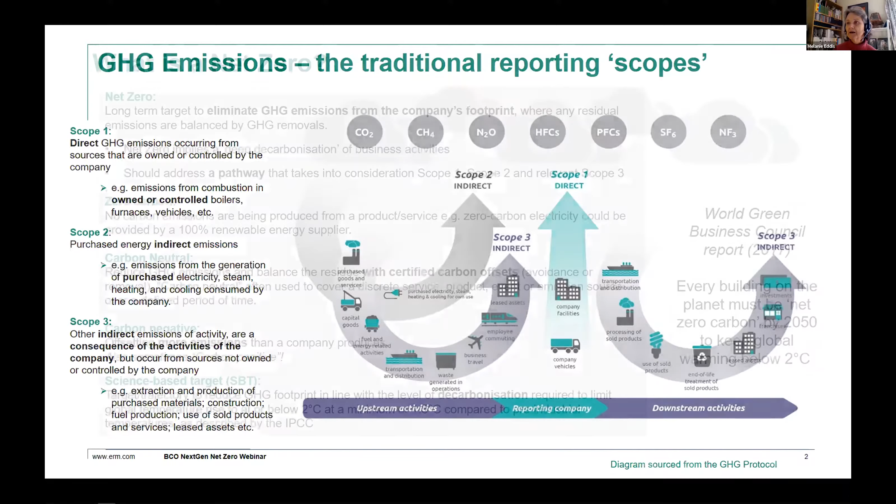So when you see carbon neutrality or net zero, it's important to understand what it is that has been neutralized, whether it's just the direct emissions of operations or whether actually it extends into the full value chain. There's lots of language around this, and this webinar is about net zero, and so with that in mind, net zero is about the trajectory to eliminate greenhouse gas emissions from the footprint. It's about the whole decarbonisation of activities, including scope 1, scope 2, and the relevant value chain emissions.

There are other words that you'll see, like zero carbon, like you might buy zero carbon energy if it comes from a renewable source. You see carbon neutral very commonly, which might be a product, or you might be able to take a carbon neutral taxi journey or receive a carbon neutral washing machine because the company has offset all of the emissions associated with making that. You might see carbon negative or carbon positive, where there's a trend now for double offsetting, or putting a big margin of offset so that you are more than offsetting your activities.

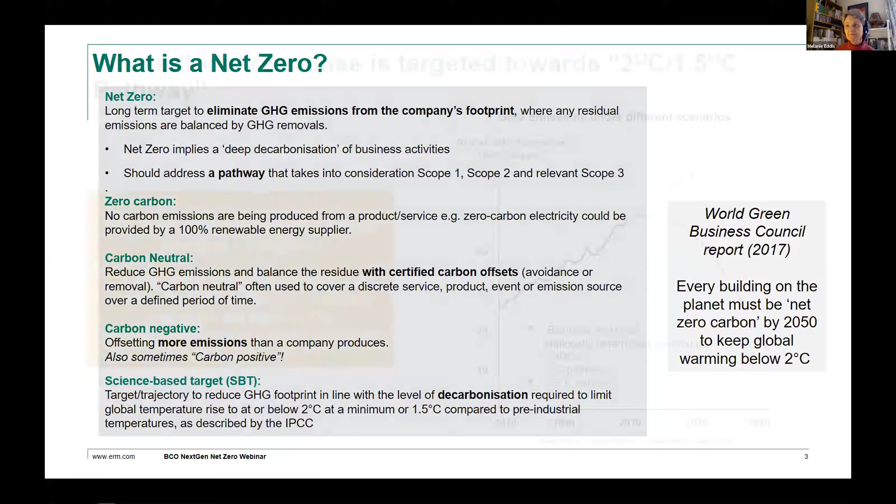And you're also seeing now companies moving towards the Science-Based Targets initiative, and we'll talk about that a little bit because it's really integral with the net zero concept of decarbonisation and moving towards what that means. And a little bit of the science: when we talk about net zero, that term stems from the IPCC, which is the Intergovernmental Panel on Climate Change, which is part of the UN process. And they issued a special report on the global journey towards holding the temperature rise at 1.5 degrees and set the pathways of how that might be achieved.

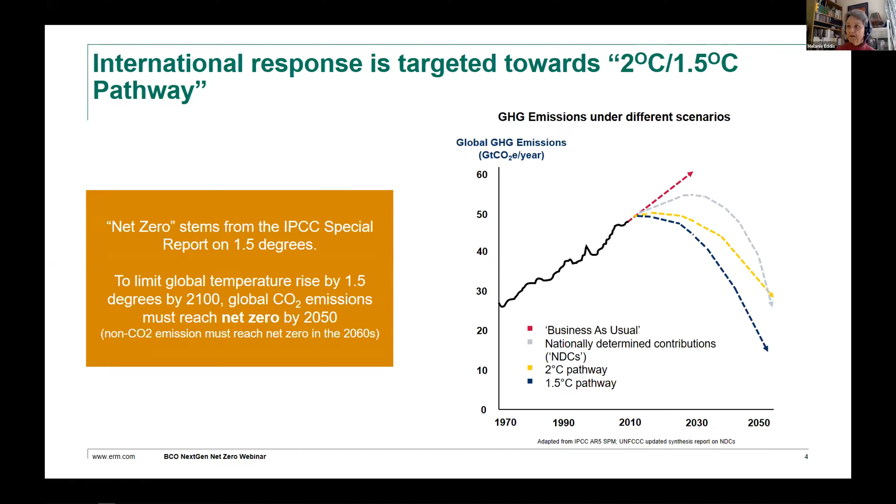And these trajectories are some of the modeled pathways that have come out of that IPCC survey, and they have firmly stated that we need to be on this bottom path, the 1.5 degree pathway, in order to safely manage the climate emergency. And what that means for you or for any entity or country that is making this net zero commitment. And one of the important things to bear in mind is that this is a moving feast. And these 4 graphs are what they call pathways. And it depends on how quickly we move.

So if we move quickly and decarbonize quickly, there's actually not much to do by the time we get to 2050 and beyond. We will have decarbonized and we won't have to invest in vast amounts of carbon removal, for example. If we don't move quickly and we end up in the P4 scenario, then we're going to need huge investment in carbon removals in order to compensate for the inevitable ongoing emissions that mankind is putting into the atmosphere. So they put forward these pathways in order to encourage governments and businesses to stick as close as they can to this early mover pathway, because that's the way to minimize that ongoing problem and the need for this massive investment in removals.

And this is directly linked into the Science-Based Targets Initiative, and there's increasing numbers of companies now which are signing up to the science-based targets, and that's about a company setting its own targets, and that's a commitment to be in line with that trajectory. And what that means is that if the world doesn't move fast enough, then we've all got to do more. So if we get to 2030 and nobody has done anything, then everybody's going to have a steeper curve that they'll have to move down. So what everybody does on a day-to-day basis is going to be challenged by how the global initiatives move towards decarbonisation.

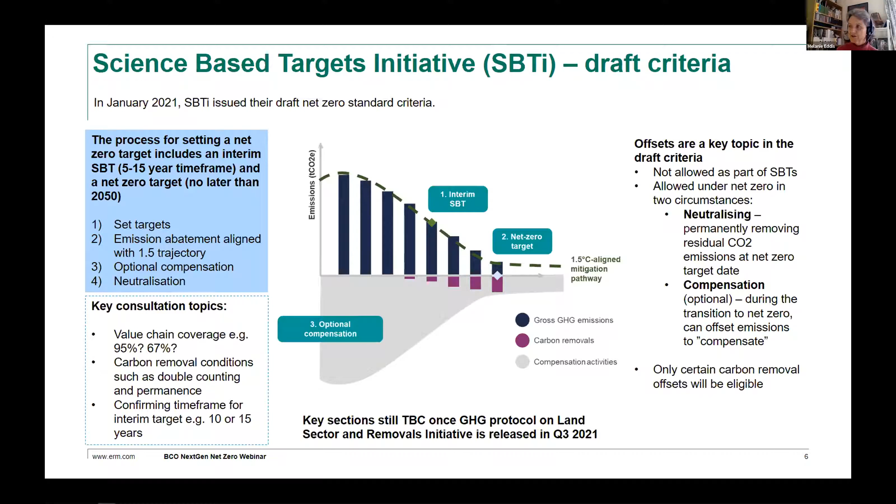Now, how you get there is that offsets are many and varied. There was a question about whether offsets can be local or whether they come from far afield. At the moment, any offset that you buy is going to come from far afield. The nature of the way that the international process has worked over the last 10, 15 years has been that emission reduction projects tend to be in developing countries or in South America, and there's politics behind that around the way that the Kyoto Protocol was established and followed through.

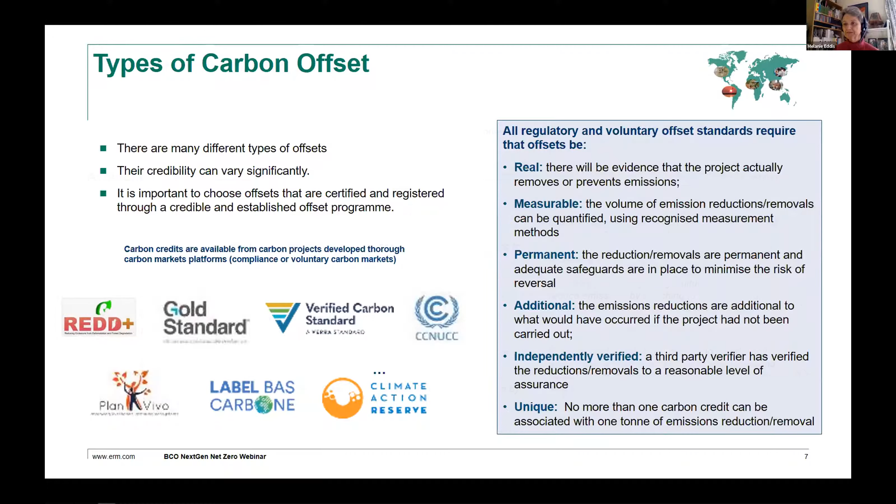Now, there are many types to choose from. Juliet just mentioned that British Land has used removals in forestry land use type offsets. You will also find many what we call avoidance type projects as well, which might be improved waste disposal, taking agricultural waste to turn it into biogas. It might be towards renewable power. So there's still a lot of projects available which are good in that journey towards decarbonisation.

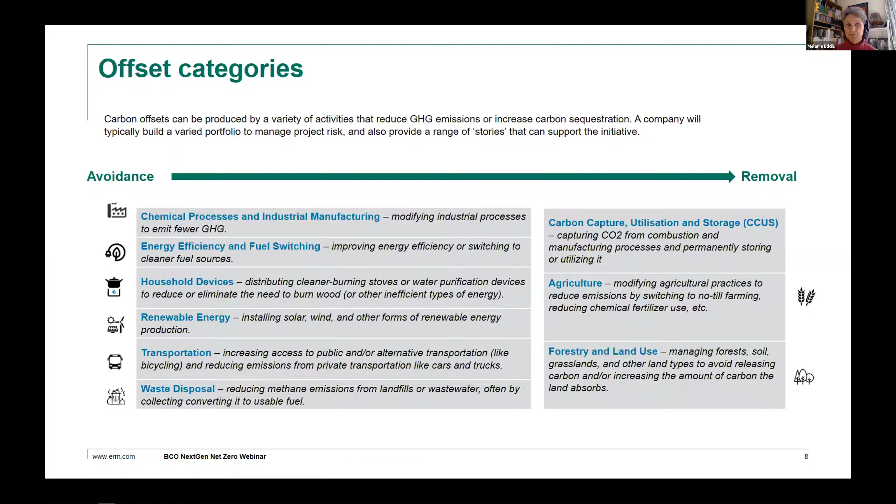But it's important to remember they don't remove carbon dioxide from the atmosphere. They simply prevent an emission from happening that might otherwise have happened if that project didn't exist. So it's really a choice, and that choice is still open as to the type of offset that is used. And there's definitely a tendency towards a preference for removals, which actually will be taking the carbon dioxide out of the atmosphere.

The other thing to think about is the scope 2, which is the electricity. And ideally, your power would come directly from a renewable provider. In the absence of that, it's possible to buy a tradable certificate of renewable energy. In Europe, they're called renewable energy guarantees of origin, or REGOs. In the US, they're called RECs.

There are also IRECs, which are international renewable energy certificates, and those can provide a backup, so that if you don't have direct access to renewable energy, you can make sure that you have backed up the electricity you buy with a renewable source from elsewhere. And it acts a bit like a carbon offset, but it's a slightly different instrument.

And the other thing to think about when you're buying an offset is... We may just need to, if we can just keep to the agenda, if that's okay. Sorry. I think you've got a couple of slides left. If you can just try and finish off, and then we can move on. Yep, I've got two left, I think. Okay, thank you. Yep, and I think this was the last one with any message on it.

Which is just to say that some projects come with extra bells and whistles, with extra societal or biodiversity or other benefit. And then there's the journey of how to get there, which I think the rest of the webinar will be addressing. And then there are lots of places to go. If you're interested in this topic, there are plenty of places to go to find out more information. So thank you.

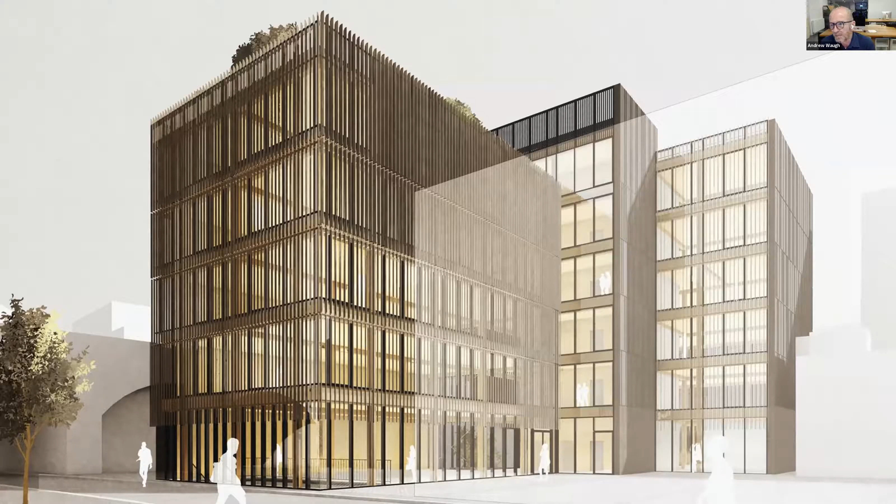So this is an office building that we're doing for the office group in Shoreditch in East London. It's a 4,500 square meters gross area, a 6-story building. And I wanted to take you through some of the calculations we've been doing for that building. So the building has a large concrete basement, concrete piles, but above the ground floor slab is entirely made of timber. So the core is made from softwood, cross-laminated timber, as are the floor slabs and the party wall here at the back.

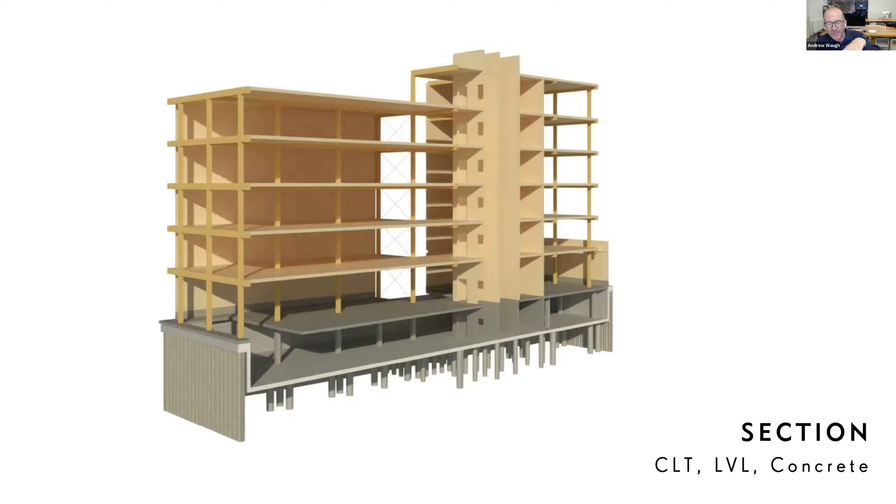And then the columns and the beams are made from laminated veneer lumber, which is like plywood made from jumbo bits of veneer, laid in parallel, which make an extremely strong section, about as strong as the same size would be in steel. So this building is completely timber from the ground floor slab up.

Now, this building at the moment in the structure is about 265 kilos of carbon dioxide emitted per meter squared of the structure. If we built that in concrete, it would have been nearly double, about 450 kilos. And if we count the sequestered carbon, that's the carbon that's actually stored within the timber itself.

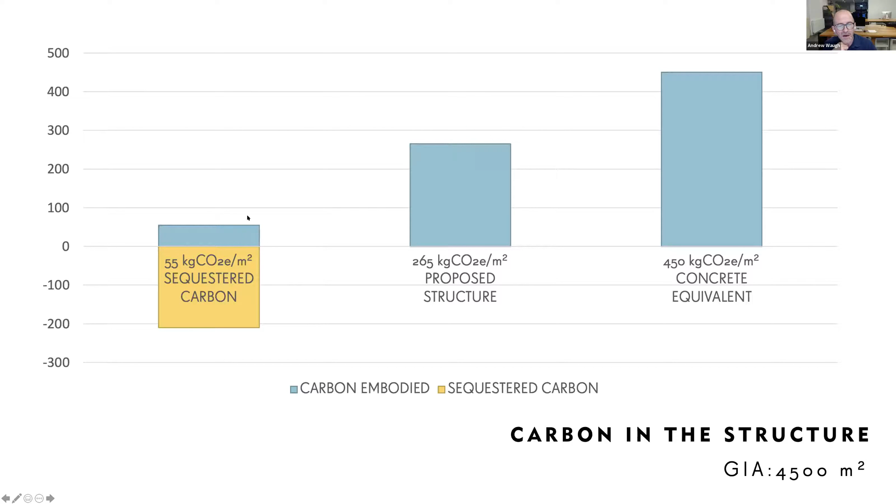So if you imagine timber being that magical carbon store that we're all looking for, as it hoovers up carbon dioxide from the atmosphere and spreads oxygen around the world, it retains the carbon in the body of the tree. About 50% of timber itself is pure carbon. So if we think about the carbon that's stored within the timber, then that reduces that figure down by about 210 kilos, so we get about 55 kilos of carbon dioxide emitted for the entire structure per meter squared.

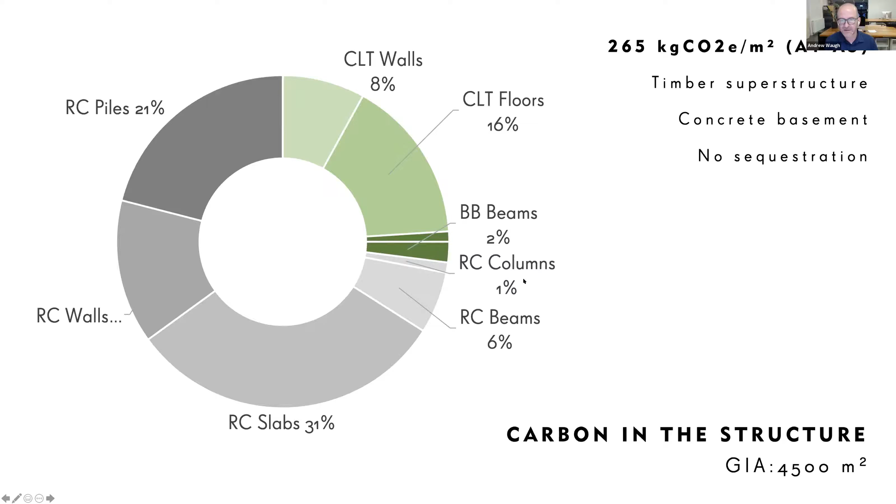And so looking at that structure, looking how it's made up in a pie chart, I love a pie chart. So 265 kilos, as I was saying before, so this is all the concrete in the gray, and then the hardwood beams and columns there, about 3%, the CLT, about 24% of all the carbon without counting sequestration. And then if we count the sequestration, we can take that much kind of the burden of the concrete out.

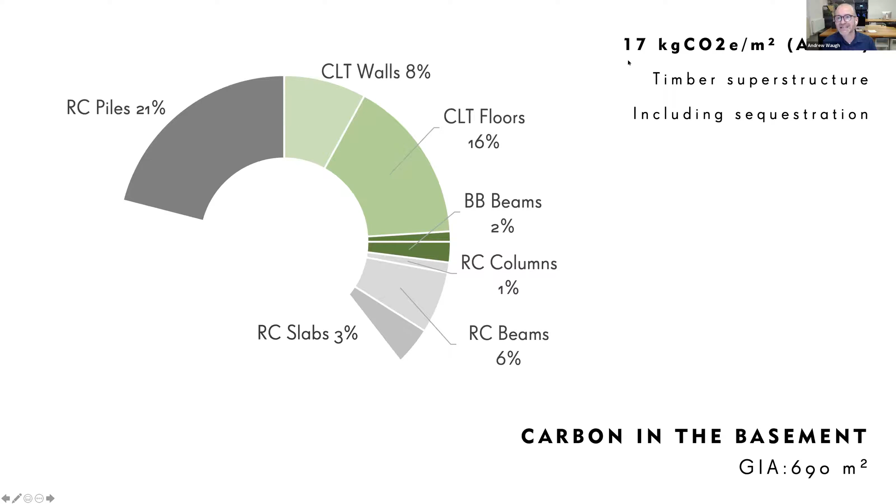So as I was saying before, down to about 72 kilos of carbon. And then if we were able to include the sequestration, about 17 kilos of carbon dioxide per meter squared. And that's done by using this timber structure. So really simple, you can see here, these are all the steel connections buried in the timber in order to fire protect the steel. We do that by using the timber. So you can see really simple connections, then a timber curtain walling system.

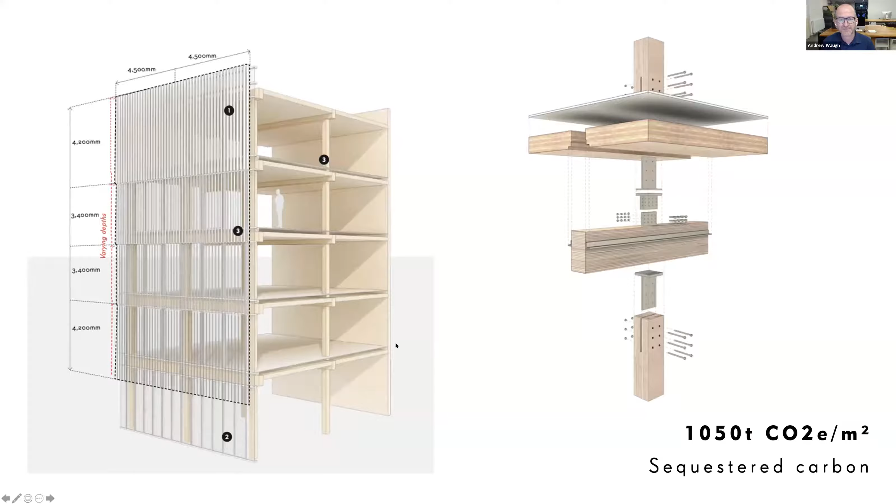On the outside of the building, it's completely clear glazed in order to make the most of natural daylight. And then we have on the outside of the building some solar shading using a thermally modified timber. So that's one that's basically been boiled in sugar beet juice and will mean that the timber will last about 50 years plus. So you can see there on the outside of the building and some very short, sketchy people wandering around there.

So the carbon targets, the metrics that we work to as a practice, are those set by LETI, the London Energy Transformation Initiative, which I think probably is the most forward-thinking of industry bodies in terms of carbon reduction. And these are the targets that LETI began to set through conversation with the industry. So we're at the moment 2020 best practice, about 600 kilos of carbon dioxide. This is for a typical multi-story new office build.

Target for 2030, so 9 years to nearly half the current targets, to 350. And then if we include sequestration, about 250 kilos is what LETI have established, a cross-consultant established target. And so when we start to bring in the mechanical, the finishes, the facade into that, we have as a building 477 kilos of carbon dioxide. That's from A1 through to A5, so the entire construction of the building.

If we built it in concrete, again, about 50% of an increase there. And if we include the sequestration, a reduction of nearly half of what it is to about 256 kilos for the whole thing.

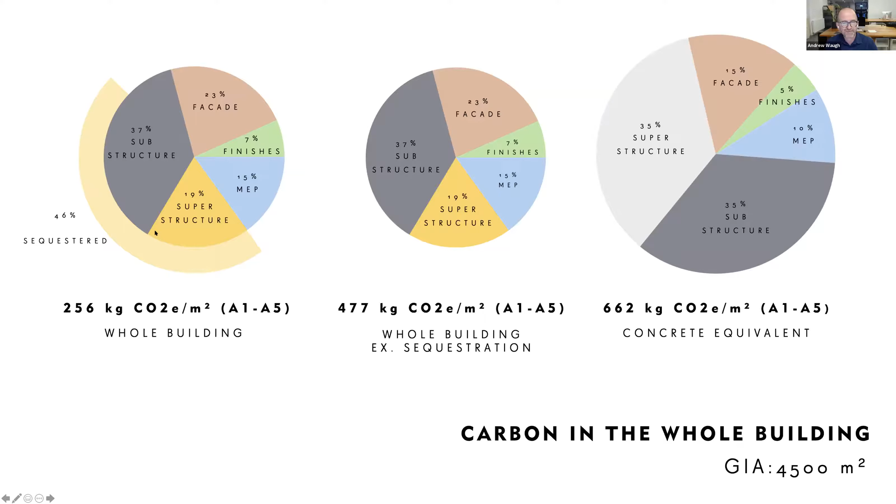That's great, Andrew. Thank you so much.

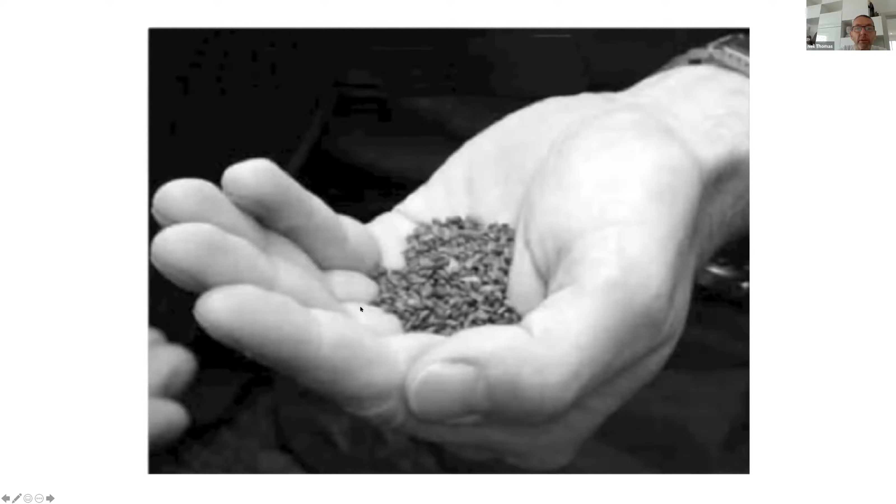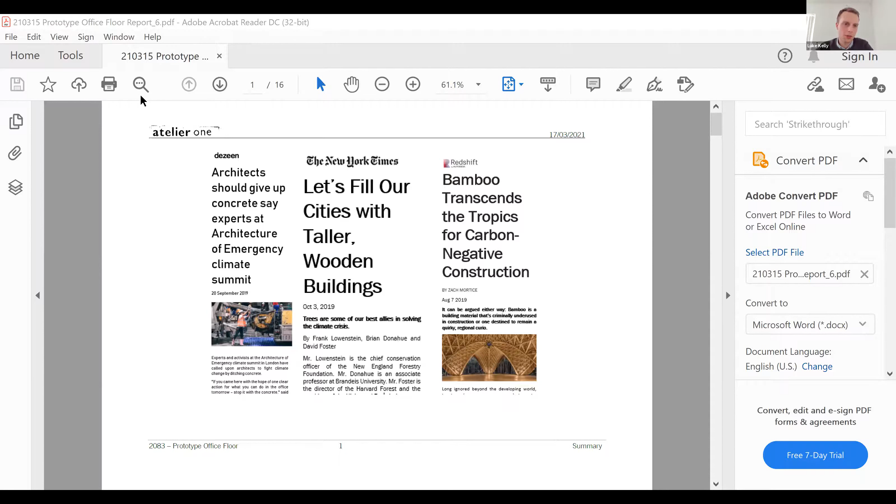That's great. That's really insightful and really pioneering stuff. Neil, over to you. Thank you very much. Can you see my screen now? Yes, we can. You may need to, if you go view and full screen, it may show it in a clearer fashion. Okay, got me. Andrew, thank you very much. I'm glad you did the metrics because I'm not, but they were very useful as a lead into what I want to say.

I think everybody understands the difference between this question of embodied carbon and sequestration, which is something that we are pursuing as an idea. And I have here in front of you a series of headlines from magazines from about 18 months ago, when we were commissioned by Juliet Morgan, our first speaker, actually, to look at a sustainable alternative to concrete floors in office buildings. And these headlines we took up at the time: architects should give up concrete, say experts at Architecture of Emergency Climate Summit.

The point being, I think Juliet said about using low carbon concretes, but actually the production of the cement that goes into making the concrete produces a huge amount of carbon dioxide. And we'd said, well, fine, let's set that aside and look at other materials. Let's fill our cities with taller wooden buildings. I think, again, Andrew, thank you very much indeed. You've led into that very nicely. You've got a perfect explanation why wooden buildings are better in your cities. And I have one other thing to add to that, and that is on the right: bamboo transcends the tropics for carbon negative construction.

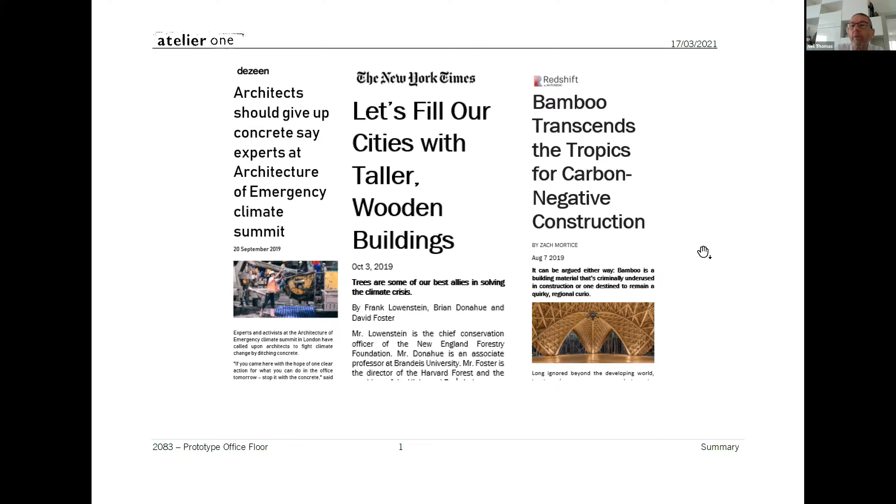We all know, and we're all familiar with wood, timber, CLT that Andrew's mentioned. We worked with an architect, Feilden Clegg, a number of years ago on a building for the Woodland Trust in the Midlands of England. Oddly, when we started working with them, they were advised that they should build a concrete building because it would be cheaper than building any other. And timber was, they are the Woodland Trust, after all. It's a bizarre idea.

But we worked on the development with them, and the point I wanted to make, because I am a structural engineer, from a structural engineering point of view, we're interested in efficiency, form, and trying to make things lighter, so that, in fact, materially, the elements have less embodied carbon, specifically because you've used less.

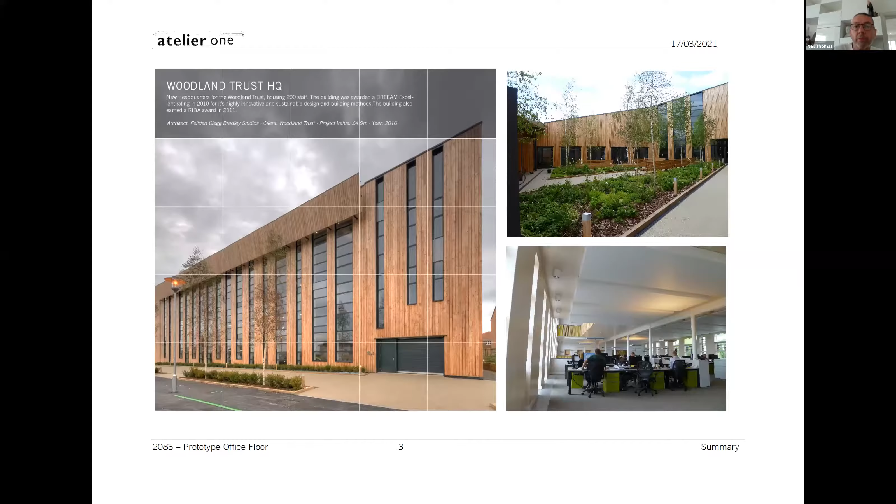This building, when we went through the whole process of comparing a concrete frame with a CLT and a timber beam frame, came out to be exactly the same price as the concrete frame and its associated parts. And the reason I bring that up is because I hear very often people talking about the fact that they immediately add a premium to the cost of timber buildings. And I think with something carefully and properly designed, I am showing you an example where that's not true.

I mentioned bamboo. I have been traveling to Bali, where I teach about the engineering of bamboo and design of bamboo. Bamboo is an amazing material, lives and grows all through the tropics across the world. Huge amount of bamboo, 1,600 different species throughout the world. It's very, very light. It weighs 1/10 of that of steel, 600 kilograms a cubic meter as opposed to 6,000. It's incredibly strong. You can see that, I don't need to explain.

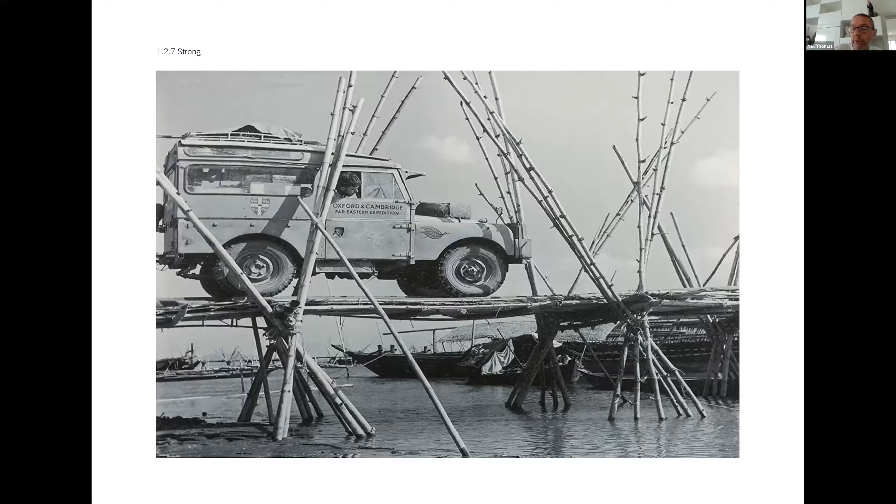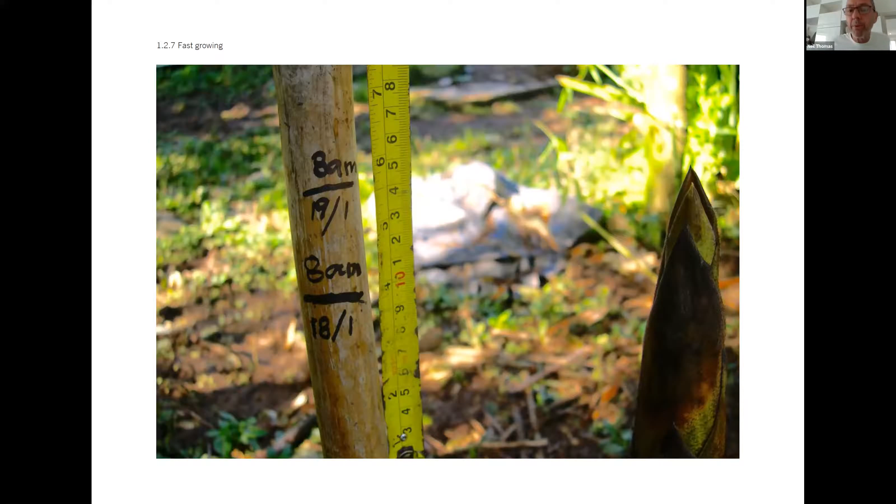And it grows rapidly. This is a diagram of a piece of bamboo from one day to the next, 24 hours later, and it's grown, you can see, 5 centimeters, 2 inches. A bamboo culm can grow from the initial base of the culm to full height, as much as 20 to 30 meters and 20, 25, 30 centimeters of diameter in a matter of 4 months. And going back to the point that Andrew's making about sequestration, there's an enormous sequestration of carbon in the process of it growing.

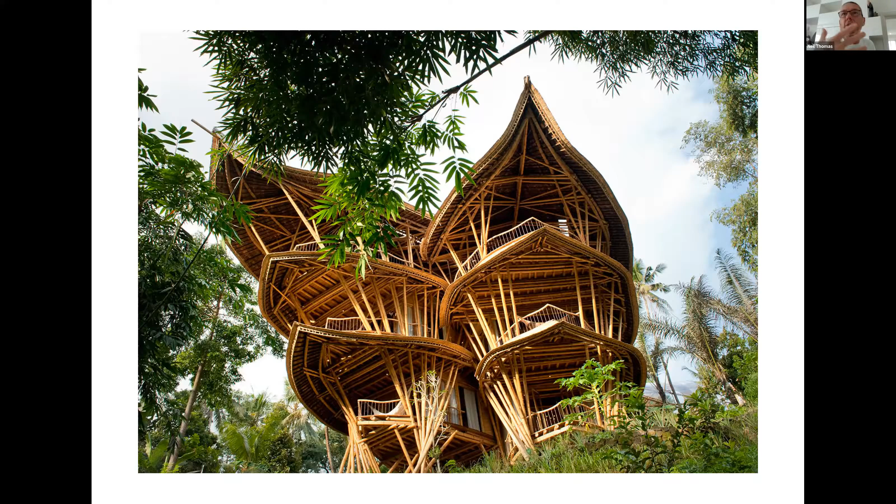So it's an interesting material, but this is the kind of thing that gets built in the tropics in Bali, the kind of thing everybody knows and loves about bamboo, natural form, very, very beautiful. But how does that work in terms of building in a modern Western construction industry? Well, in the relatively recent past, and it's in its infancy, but it's happening, they are taking bamboo and converting it to those engineered sections that we all know and love in timber, CLT, laminated timber, etc. This is an incredible product known as radially laminated bamboo.

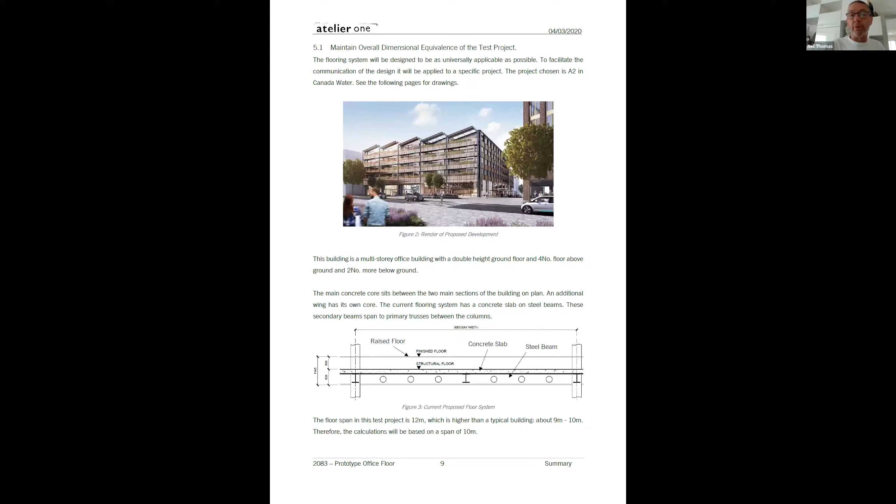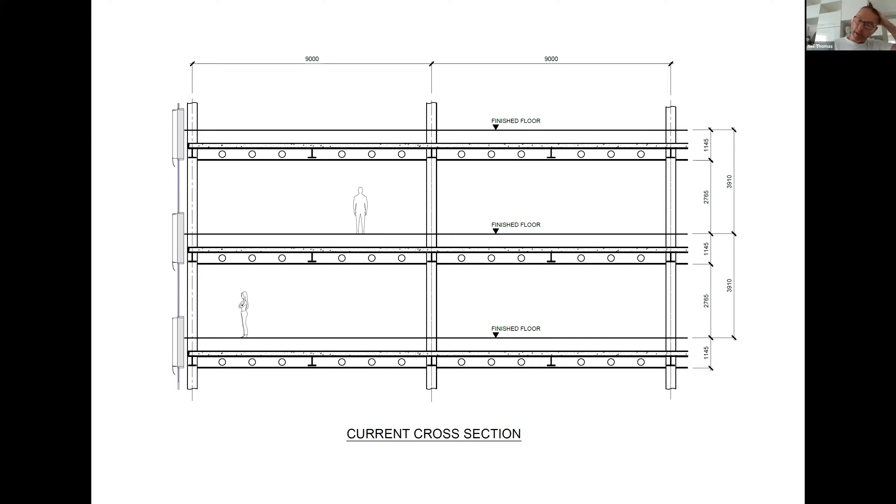They said we had to meet all the requirements necessary for the office buildings they have. So structural systems criteria, structural requirements, vibration, which is a very important thing particularly with timber because of its elasticity and lightweight, deflection requirements, acoustic requirements, fire requirements. But then we also had to maintain all the building systems exactly as they were. They did not want us to go and change them, come up with bespoke systems. That's the environmental strategy, glazing solutions, raised floor systems.

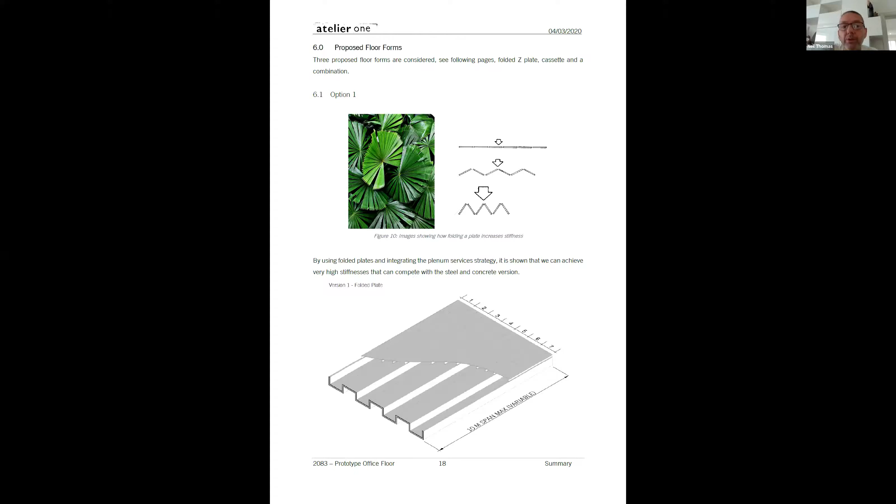So jumping to the solution, which took a year, but I'm going to get there anyway. We drew on nature and folded plates. Nature is a great place to look for ideas in structural engineering, I promise. If you've ever got some time, go out and do it. Just see these fans, these palms, they are folded surfaces. It gives them extra stiffness. So we took the idea and applied it to the floor system you could see below there.

And so this is the comparison of the two, the original solution, their concrete floor, with the raised void for the plenum, and our proposal for this folded plate timber and/or bamboo floor. And it's very important to understand that the depth of the structure there, the 3 dimensions, 120, 410, 120, make up a very steep, stiff, deep section using shape stiffness.

Using shapes to, sorry, excuse me. I can't talk to you. Sorry, my daughter just walked in the door, apologies.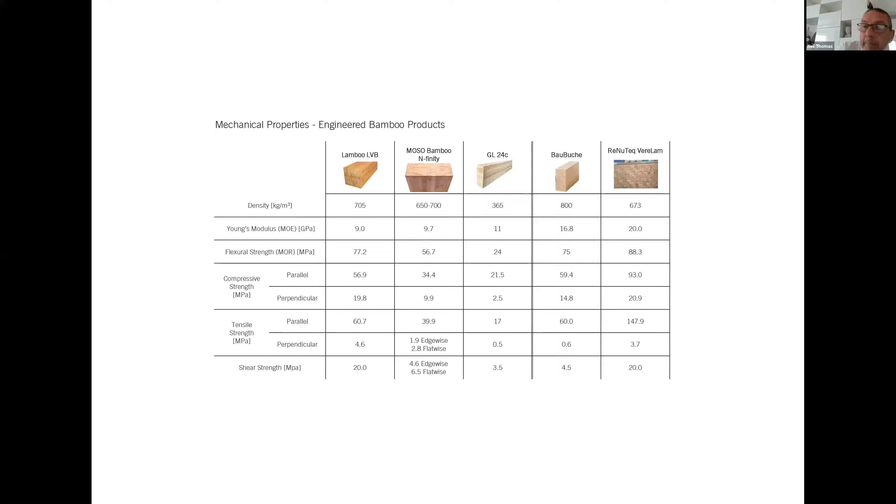Now look to the right, the ReNuTeq VereLam, which is the radially laminated bamboo I showed you a minute ago, is 93. It's almost 5 times that of a standard timber. So amazing things happen, right? So now we've got the stiffness through the shape thing. And now what we're doing here is comparing the charring of a typical floor. So you see a deck on the left here, floor spanning onto beams, and the beams span that hierarchical system, and the folded plate system we talk about. It could be switched either. Both could be bamboo, both could be CLT.

Sorry, Neil, I'm going to give you a 2-minute countdown. Okay, no, I need one minute.

Okay. The standard floor system with its hierarchical system, because it burns through and reduces the stiffness of a horizontal plate, over a 2-hour fire gives you a reduction in stiffness of 73%. The folded plate did this amazing thing. Because of the nature of the geometric stiffness of it, its reduction in stiffness in the same fire condition was by 39% only, which means you can use a lot less material.

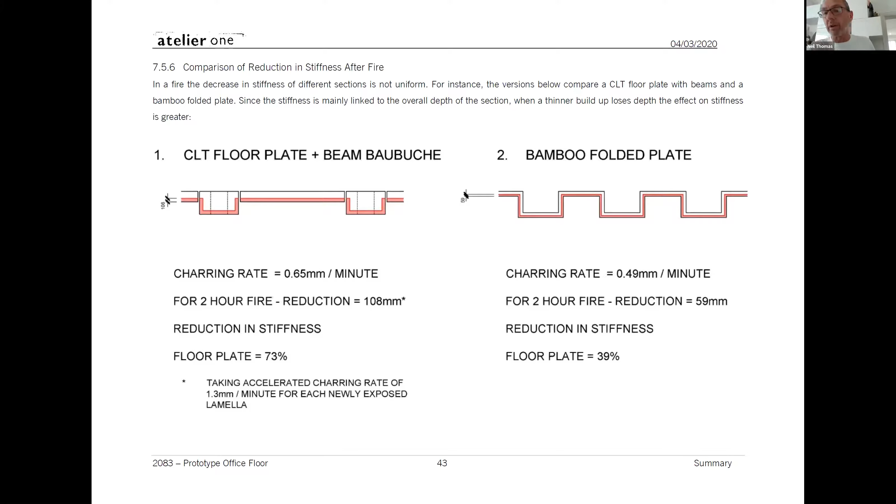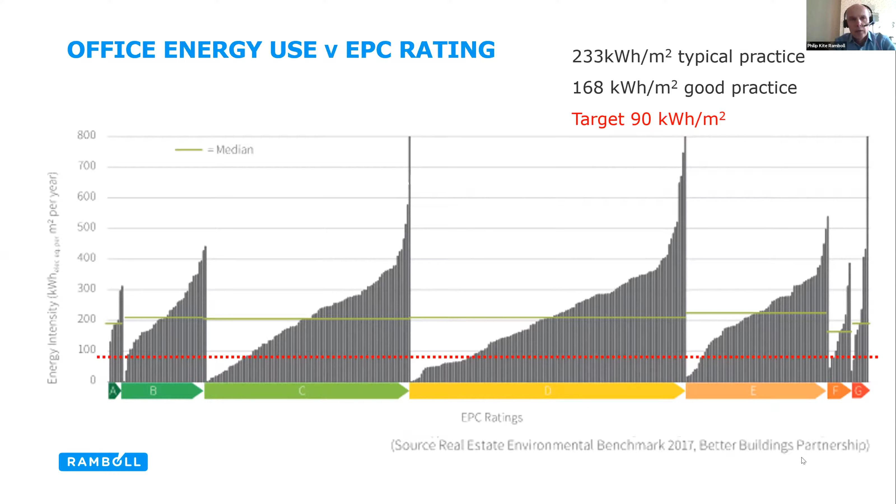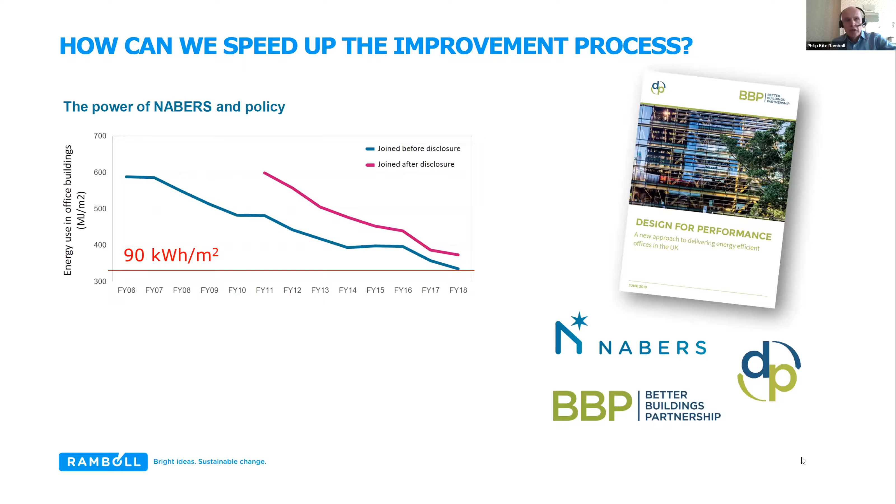So we have NABERS UK that started last year. So we've imported this over from Australia. So over the last 12 years, their buildings have gradually improved, and they've just about hit the 90 kilowatt hours per square meter target. So that took them 12 years. We need to do this tomorrow. So are we capable of making such a fundamental change to our buildings to be able to deliver this? So we do have some problems.

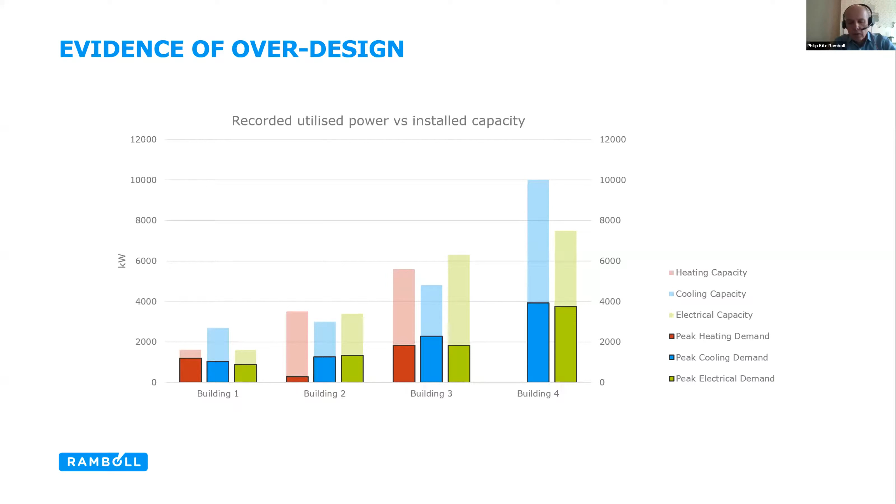So here's just another graphic that shows the over design that we get in buildings in terms of capacity compared to what buildings actually use. And I think this is a key pointer to our poor design and our approach to design that needs to change. We need to do something fairly fundamental. So I just want to show how we go about this. So this is a graph of the London climate, number of hours per year against different temperatures.

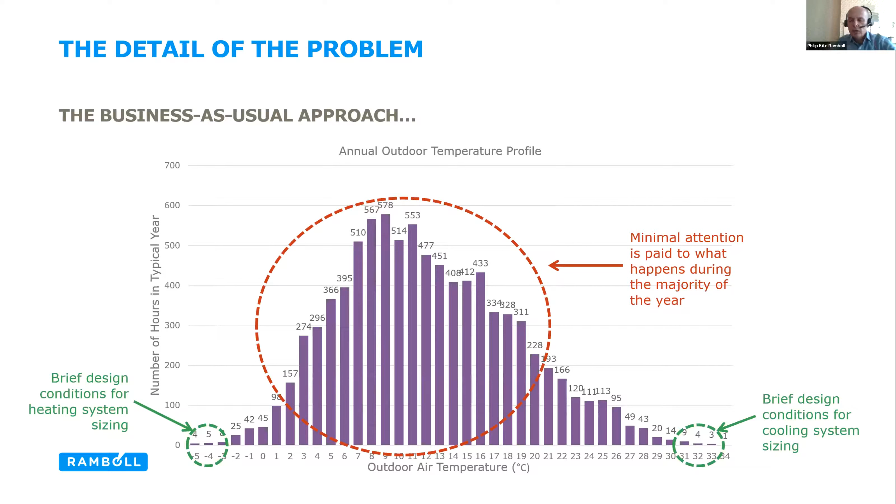So the trouble with the building services side of things and developers is that they give us a design brief that says you must hit this target in winter, -4, and you must hit this target in summer. And these become how we start designs. But buildings don't actually operate for any significant length of time at these extremes. If we want to do things better, we've got to look at what happens for most of the year. So our new design criteria should be 10 degrees C.

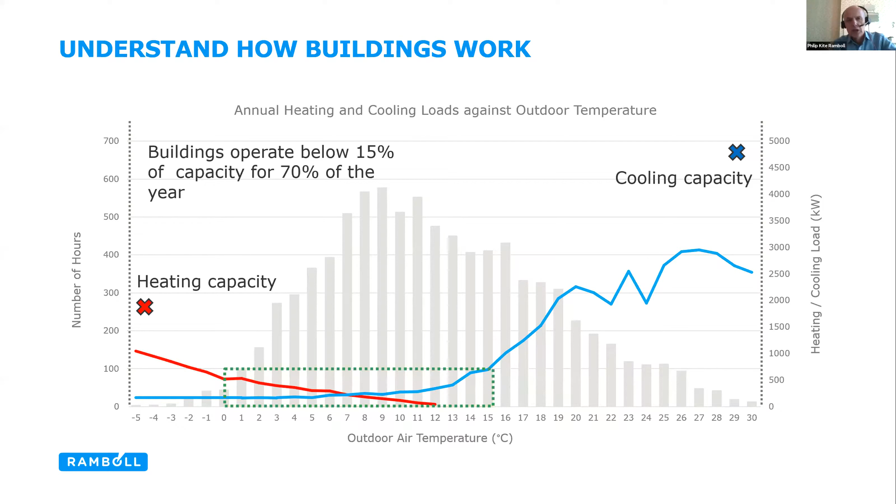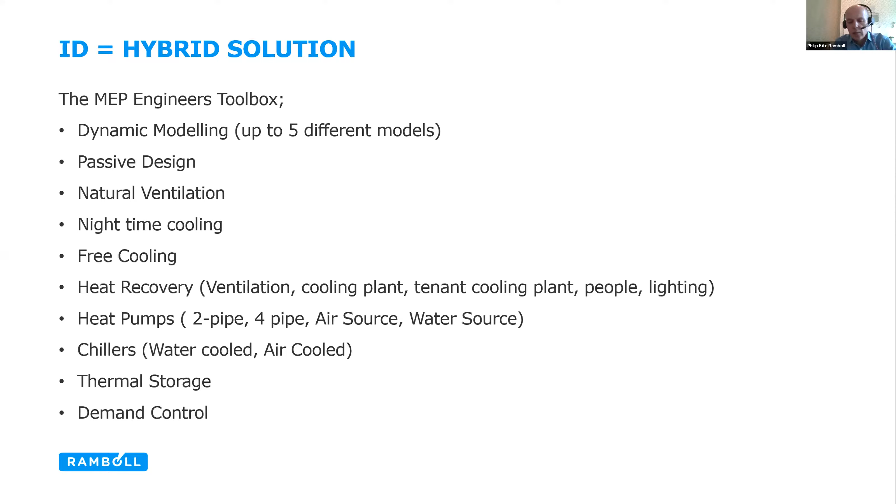You really need to take a different approach to how you design the buildings, and you've got to design from the inside out, not from the kind of outside in, at least in terms of the graph. So intelligent design is what's required, and what we need to think about is hybrid solutions. So we've got a lot of tools in our MEP toolbox, lots of different ways of doing it. And you have to approach every job with the right mix and the right allocation of these different solutions. And you need far more variety for any particular building, so it operates most effectively for any particular temperature and any amount of demand placed on that building.

So this is quite an exciting project we're working on with British Land, 2 Finsbury Avenue. It's just got planning permission. It's a fairly enormous building. But our mantra is, how can we design a building that's capable of housing 7,000 people? How can that building operate efficiently for 30 people on a bank holiday weekend? Now, if you can do that, I think you can hit the 90 kilowatt hour per square meter target. And that's the challenge. It's a bit of a rethink. So this is how we've approached it.

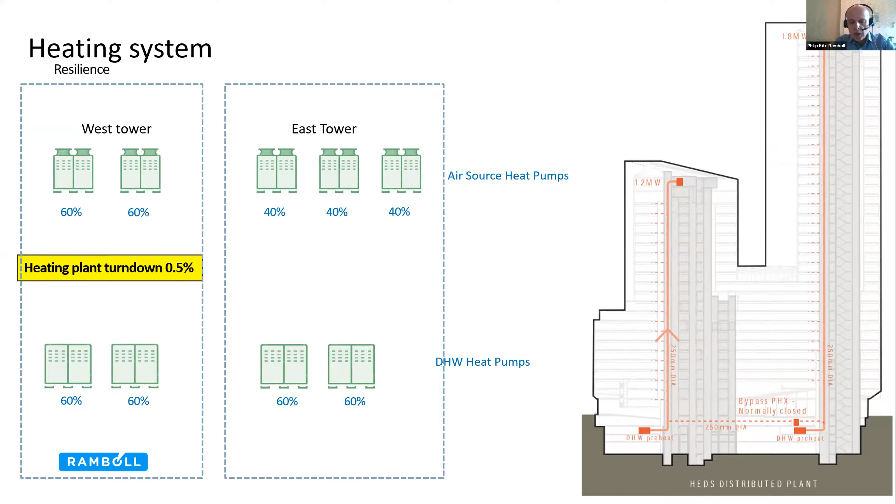So our heating system, we've actually got 2 heating systems. It kind of lends itself. We've got two towers, one to each tower, and we've got some heat pumps. So we actually find that the building heats itself largely. We just collect the heat in heat pumps, and we put it back into a heating system and pump it round and round, and that works really well.

The cooling system, so we've kind of got 2 cooling systems. We've got the heat pumps, which are the same heat pumps that do the heating. They do heating and cooling. So the cooling is actually the collector of all the heat that's produced by the occupants, by the lighting. And we just put that through a heat pump, and we can heat the other parts of the building. It's really efficient, really effective. So we can run the whole of this building on these quite small heat pumps at the top of the towers for 7 months of the year.

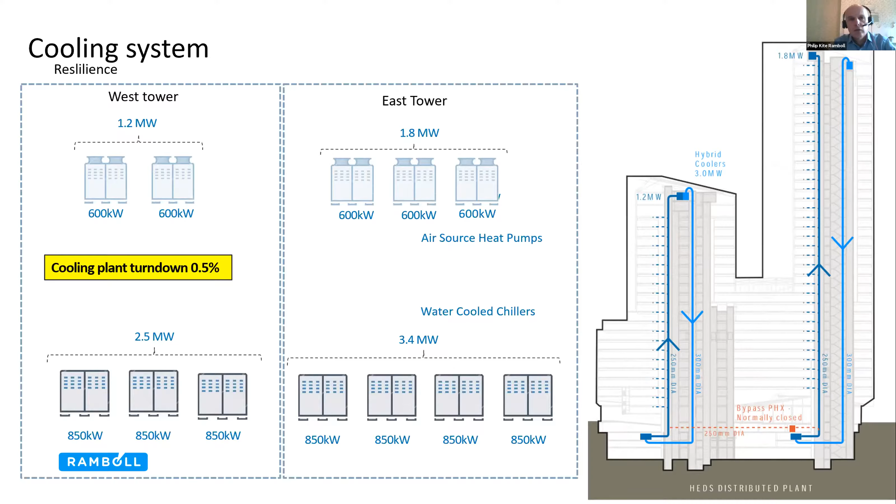In the summer, clearly it gets hot, so we need more cooling, but we have a number of modular chiller arrangements that we can turn on, so we can just bring on the amount of cooling we need very efficiently and very effectively. Ventilation, clearly that's a big issue at the moment. So we've got a variety of ventilation systems. On the right-hand side, the eastern tower, we've got floor-by-floor ventilation plants. We've got 2 small air handling units on the floor, so clearly we can get good control from that.

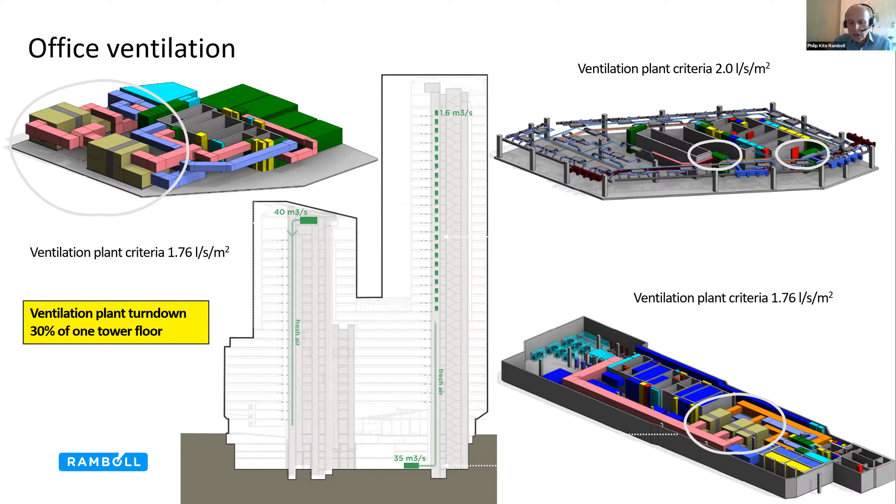The challenge is what do you do with big air handling units serving large floor plates? How can you do that effectively? So typically, one of those air handling plant rooms has got 3 big air handling units, each serving a separate riser. But with just a simple duct connection between the air handling units, we can get 1 air handling unit to serve all 3 risers, and we can put some modular fans in it, say 6 fans. So we've instantly got a 5% turndown on that ventilation plant. So we're just making big strides forward. And the other thing to do is how do you actually control ventilation on a big building floor plate? So what we're doing is we're dividing the floor plate up into zones of around about 150 square meters.

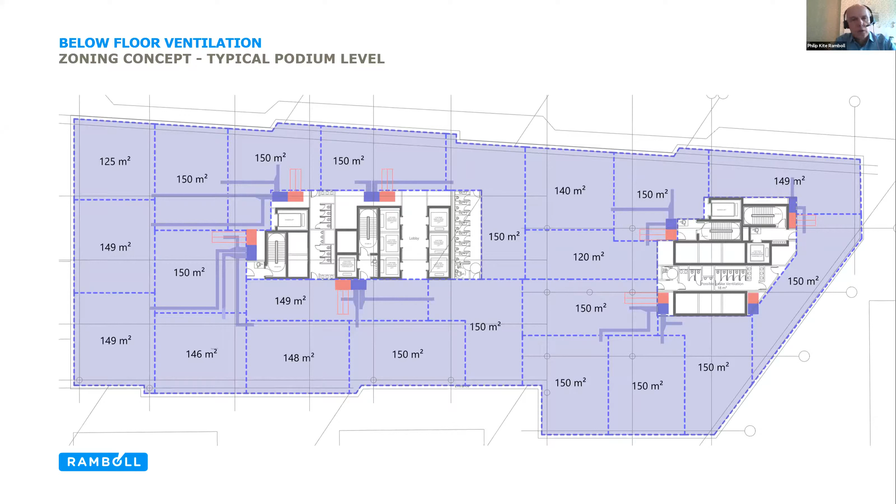The ventilation goes through the floor. So you can occupy any one of those zones and control the ventilation to those zones just on occupancy sensors and CO2 sensors, and just bring fresh air to that one zone on one floor without having to supply air to any other part of the building. So that's how we're designing this, and we are getting very close to the 90 kilowatt hours per square meter target. So not only operational energy and operational carbon, we're also looking very hard at embodied carbon.

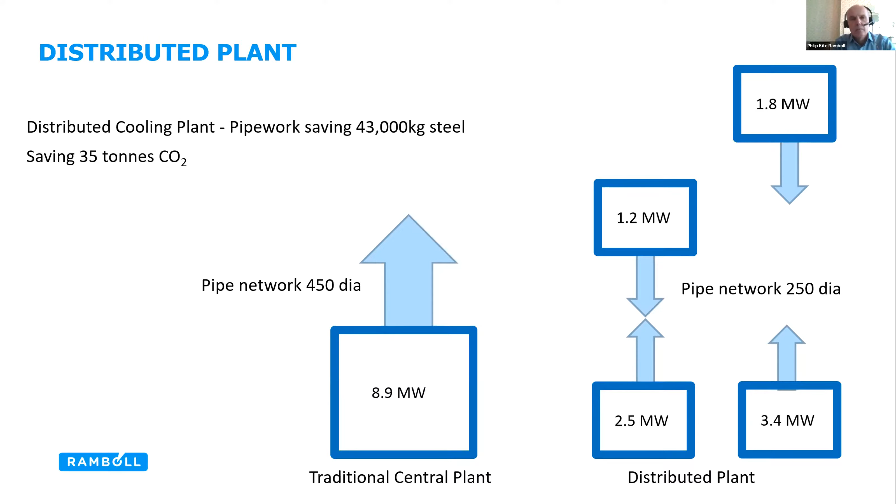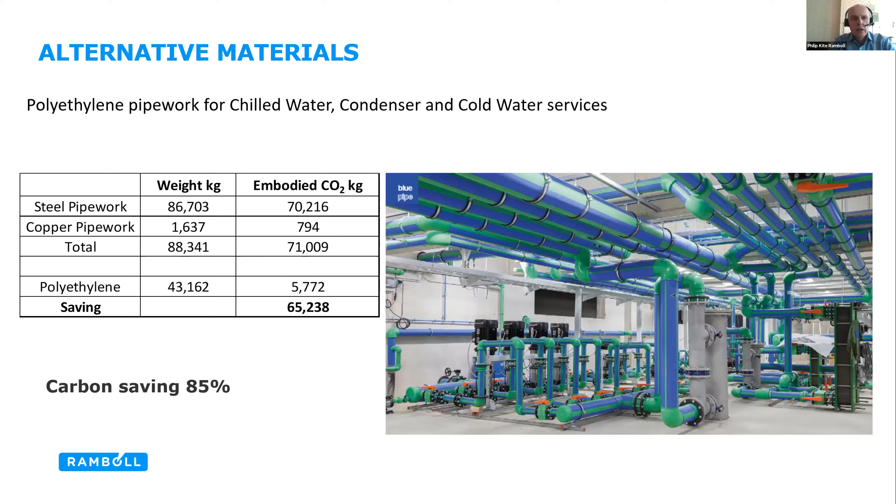So one of the interesting things about distributed plant: rather than a big 9 megawatt chiller plant with a 450 diameter steel pipe coming out of it, we're going for a distributed plant. The pipework's a lot smaller, so it saves 43 tons of steel pipework, which is a significant saving in terms of CO2. And then, well, let's look at different materials as well. So this is polyethylene. So we can save 85% of the carbon that we would have had in steel and copper pipes by going to different materials.

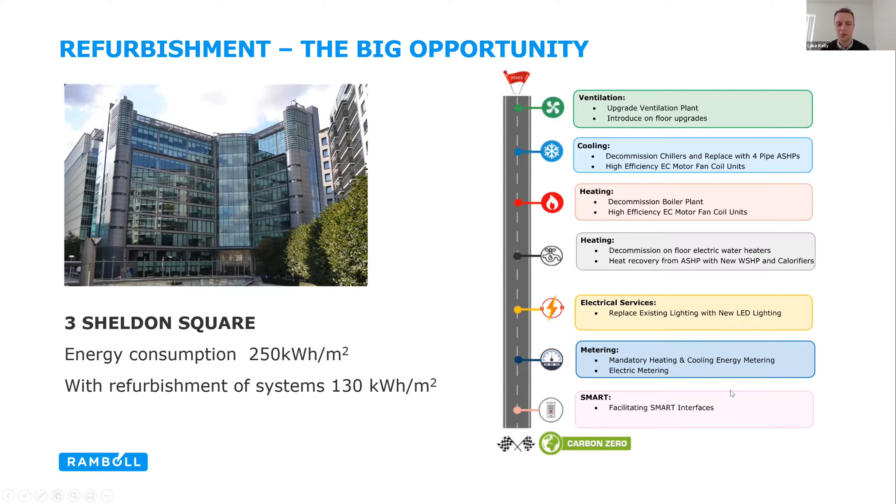Thank you. Poor timing from me there, Philip, sorry. I feel like the Grim Reaper cutting everyone short, so apologies for that. We're trying to cover a lot today, so thank you. Over to you, Stephen, to finish off. Can you see my slides? I can see your pretty face. I think he's frozen. I think he's gone off, actually.